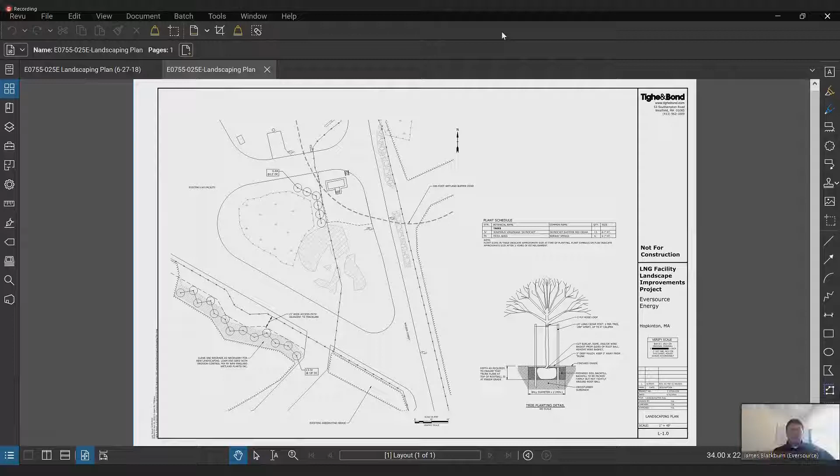Okay, so you're removing some scrub, call it about 20 feet, and are there any other trees or whatnot that you're removing in there? I believe there's one mature tree in that area. If you went back to the street view, Tim, there's kind of one mature tree that is fairly well overgrown, but I would consider it to be a mature tree. It's that one right there. The rest of that in there is primarily brush.

Okay, and then last question for me. You have 15 feet of clearance around the rest of the perimeter fence on the property. I guess that's not a perimeter fence though. No, we have two fences - we actually have a security fence and a perimeter fence. Outside of the security fence, which is just a security fence, we do maintain a cleared buffer. I'll say we strive for 20 feet. I think we often have to thin that down to 10 or 15 feet. In this case, we're probably down to the 10 to 15 feet. But there's a couple areas, I think as part of the new project, there was an area with wetlands, so we limited that so we didn't have to clear into it. So there are a couple areas where it's slightly less, but generally speaking, that's the case.

Okay, Mr. Gelcich, what can you just walk us through - you had a nice note in the memo, but can you quickly describe to us what our options as a planning board are before us? Yep, so many of you are probably familiar with this process. We went through it in November of last year for this project. The planning board can determine whether what's proposed now is a significant change from the intent of the stormwater management permit. And so if those changes are significant, you can require Eversource to come back with a new application and basically amend the permit that was approved through a new application.

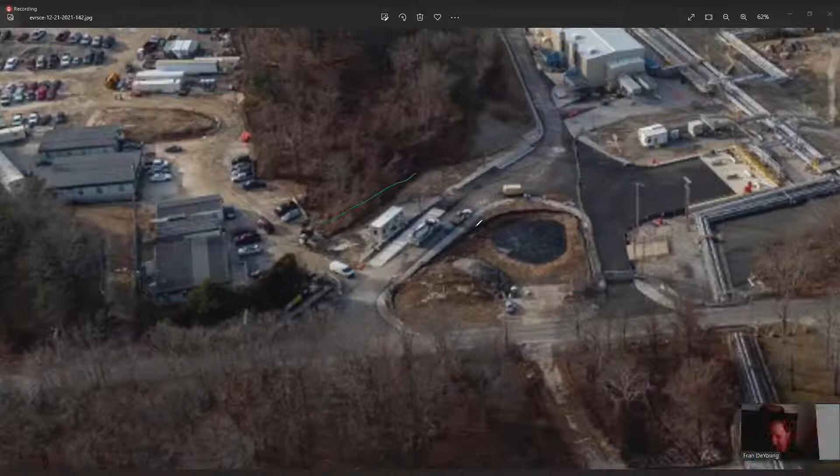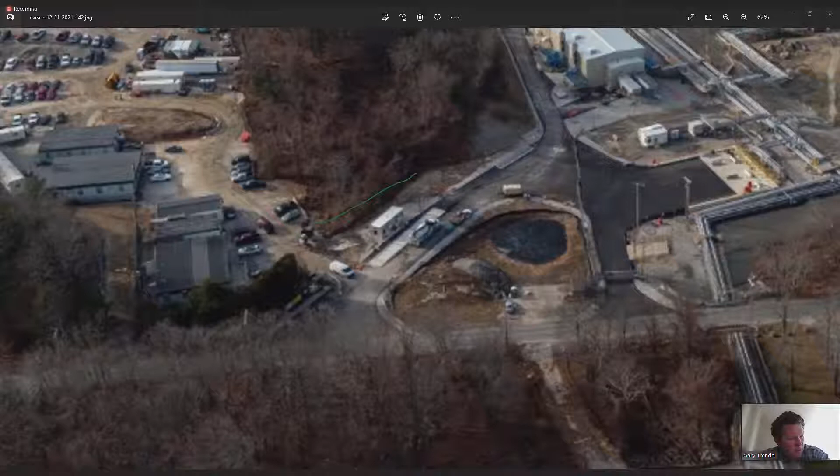Agreed. So on that note, I will entertain a motion to determine that the proposed changes are not significant. John, does the motion need to include anything other than that? You may want to say that the determination for not a significant change includes the work proposed in the application, for clarity as to what you're actually saying has no significance. So I will entertain a motion that the planning board determines the proposed changes are not significant and that the extent of the work is what is referenced in the materials provided to the board. So moved, Mary Larson Marlowe. Rob Benson, second.

Sorry, John, did you have something else? No, you said it fine.

I was just going to say, if you wanted some language in the memo, I have the language from the applicant that they put. The proposed changes to the approved project include approximately 3,100 square feet extension of the current limit of work, consisting of cutting existing trees to provide space for additional screening plantings as required by the Department of Public Utilities in response to a request by the Town of Hopkinton. Perfect, I'll modify that as a friendly amendment.

Accepted. Mary and Rob, does that work? Yes, that's accepted. Mary Larson Marlowe, yes, I agree, Rob. Any further discussion before we take a vote?

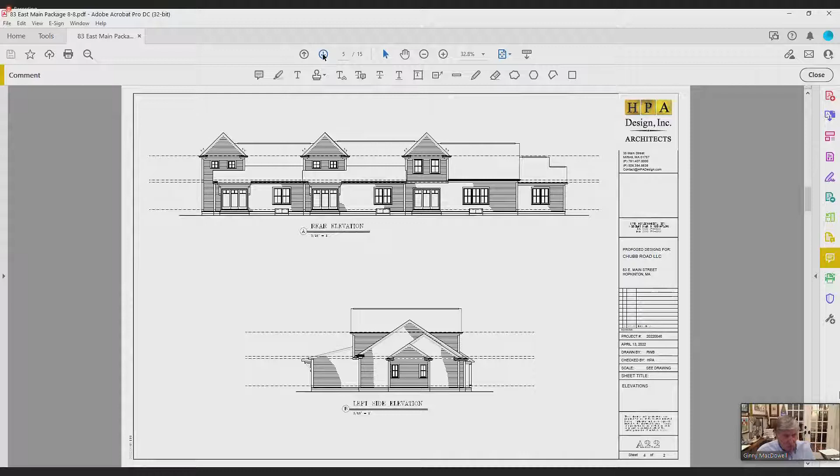This is a frontal view of the 3 units. You can see the 3 garages, the dormers, side view. This is a rear view - you can see the doors going out to some steps, then down to a lower level terrace.

Just to give you some sense, we're talking about some white trim, some very light colored gray tones, something very much in keeping with other things you've seen in the area. Again, a frontal view with some color tone.

This is the antique house that's there currently. We had an architect come out and measure the dimension of all the windows, the cornices, the roof lines, everything, and this is an exact replication of what that would look like. This we submitted to the Historic Commission.

Now we're going to go through these plans. These plans have been reviewed by Phil from Beta, and there was a lengthy list which I have at the end of this. Once we get through these plans, you'll see the updated plans as of today and answers to the questions on Phil's list. These actually are the updated plans, so we're going to go through the updated plans and then the list.

Oh, okay, so you changed them. Yeah, I took out the old ones, they weren't relevant.

So you'll see we created an easement on the far right side of the site in case, for whatever reason, one needs to get in and do some work on that basin that currently exists. So that'll remain an open zone with an easement. You'll notice the three driveway entrances, one driveway entrance coming into three garage entrances. There's quite a bit of detailing with drainage, grading, sewer lines, water lines. When we built Legacy North, we purposely tapped sewer, water, and gas lines into the site from the street, so they're actually already tapped on the Legacy North side of the site.

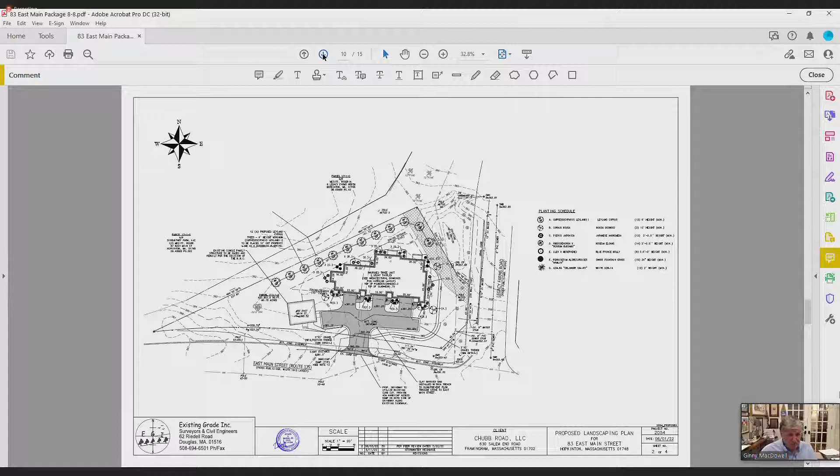Just some details of what's required for the various components of the project. Again, spec details.

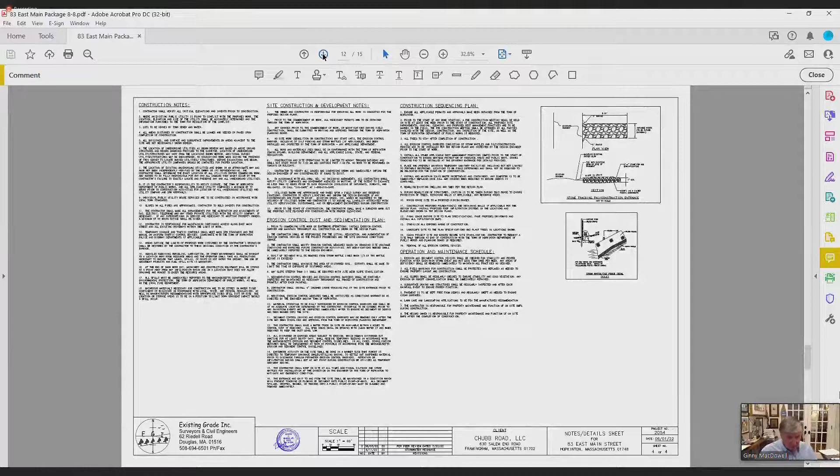Okay, now this is Beta's letter, and these are the answers. I believe our engineer has spoken to Phil earlier today, and I think we've covered all the points. The one point that's not covered here - I sent John an email earlier today from Tom Poirier from the fire department saying that he does have sufficient and adequate fire emergency access to the site. We can go through these or you can just look at them, but basically all the details that Phil wanted, whether it be the handicapped, drainage, lighting, perimeter, siltation during construction.

Again, spot grades, the post-development, the easement that we talked about. I believe we've covered all the points. Anything else, Eric? That was the last page. That's it. Okay, so that's everything.

We're more than happy, whether it be Phil or myself, to answer any questions or comments. Okay, thank you, Roy. We do have a public hearing outline that we'll use here. So I'm going to hold off on questions or comments until we get into a little bit more detail. But our next item on the outline is staff report. So John, do you want to walk through the staff report?

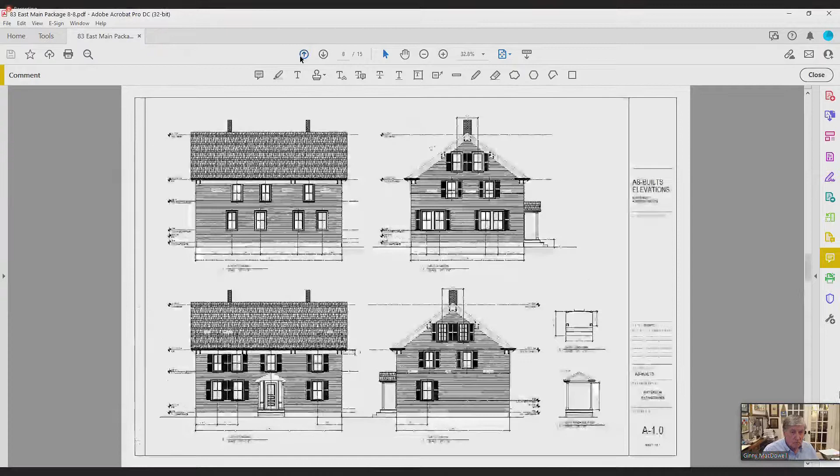Okay, so am I understanding this correctly or not? That there are 4 car garages per single unit, so 12 cars for 3 units. No, those are 2 cars each. Okay, so it's 2 cars per unit, so 6 car garages total. Correct. Thank you, because I'm looking at it like there's no way mathematically I'm seeing this right. No, you're right. Okay, so that was my first question.

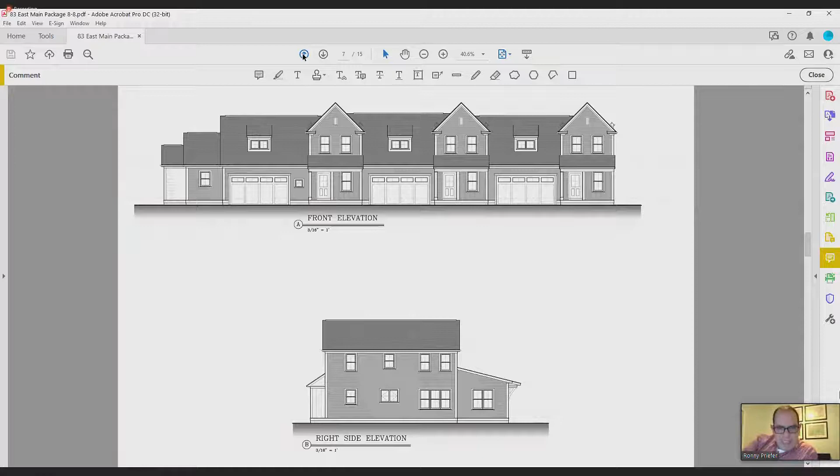And secondly, could you show the rendering of how much driveway would lead up to that? It's like the aerial shot. Okay, and is there enough room for turnaround on the far right? Because I'm looking at the right versus the left. Yes, that's what the little dog leg is for.

Okay, now is it allowable in your opinion for, in the future, someone to have a third car, whether it's a resident or parked there because someone's staying over or something like that? Is there room as opposed to parking on the street? No, well first off, if you have 3 cars you would put 2 in the garage and 1 or 2 in the driveway. So each unit has enough parking for 4 cars. Okay.

Okay, so that was my first question. And my last question I have before, I'm going to save some for others later: what is the square footage per unit?

I don't have that in front of me. Phil, do you remember what that is? Yeah, I think it's approximately 2,200 a unit, very similar to the trails. 2,200 a unit, yeah, and they're all the same size, just different layouts. Correct, absolutely. And then I think Roy spoke earlier, but they are all 2-bedroom units. These 3 are - there's a bedroom and a loft on the second floor. There's a master on the first floor, I believe.

And are these designed for a certain age demographic, or is this for all? No, they're actually age restricted, 55 or over. Okay, thank you. All right, who wants to go next?

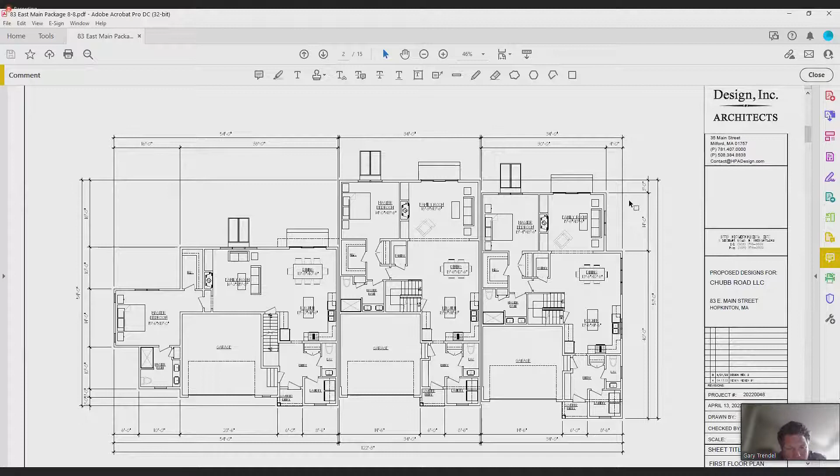I guess it depends on what kind of car. Yeah, no, I agree with that, but on average, my architect will tell me that 22 is the minimum and 24 is desired. I guess where I'm going with this - I realize it's very common for developers to put smaller garages in, but if the expectation is to fit 2 cars and 2 trash cans for recycling and waste into a garage that's reasonably small, and they look closer to 16 by 16-ish. I mean, they look pretty small.

We'll get that information for you. Okay. Actually, I can't tell from here. We'll find that out. All right, it looks to be 19 feet 6 inches. 19.6, okay - it's 19.6 wide by 20 plus deep.

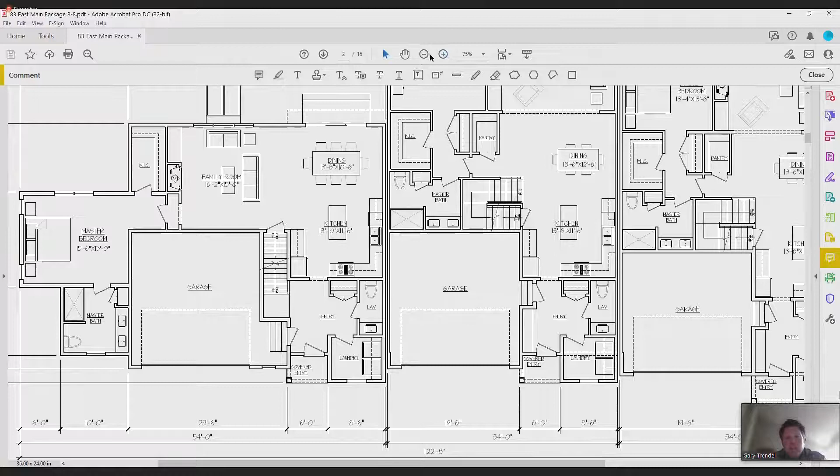Okay, all right. And again, I'm just cautious of the fact that aside from the driveway spots in front, there is no other visitor parking. People have a family gathering - I'm not really even sure where in the vicinity they could park if they wanted to, because this neighborhood is a little bit street locked in a sense.

And then my last question, just on that note - while this doesn't apply to the single family house, that house doesn't have a garage, so it only has 2 spots in front of it. I'm just thinking of a family who are likely going to have 2 cars, and they have a visitor - where does that visitor park? So I'm just a little nervous, because it's not like there's a street they can park on. There's not a lot of options elsewhere. For 4 houses here to not have really any visitor spots of any kind is concerning for me.

Just to note, I believe the historical house has 3 spots. Three. Okay, all right.

Through the chair, one last comment. Yeah, go ahead Rob, and then Ron, we'll go to you after Rob's comment.

So all the way from kind of Clinton Street or Weston Nurseries, this house and this property will basically be the only homes on that section of East Main Street until you get down the hill, and basically at the bottom of the hill, after the area where the Eversource line passes under the road, there's going to be no houses besides this house and this proposed structure for about a mile. So it definitely - and it's at the top of the hill, so people are going to notice it. It's not going to go unnoticed, that's my larger point.

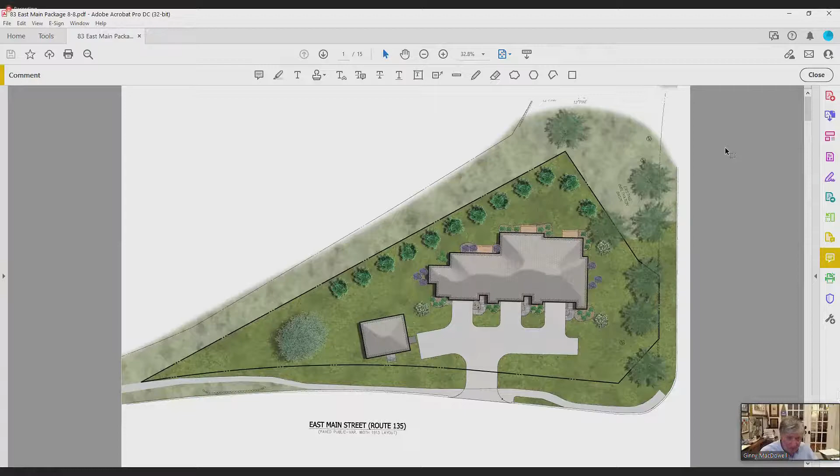To turn right, but I'm asking about turning left. Would that cause any issues? Because if you want to turn left and there's a light there, the cars start backing up because of the light. That's my concern. Yeah, I've been out there many times and I've never seen an issue where it's queuing up beyond that driveway. That's one of the only lights in Hopkinton that doesn't have that issue.

Ron, for what it's worth, I know they've used that lot in the past for parking for events at Weston Nurseries, and at least I've parked there a few times, and I don't recall any big issues there. That's just anecdotal, one person's perspective.

Just one perspective. And so my last comment is somewhat echoing Rob's. If it's not landscaped well and doesn't blend in, I understand you're in a predicament. You have a home there. What else can you put there besides other homes, without making it look odd? Like, oh, we have a home and now we have an office building. It doesn't seem right. That's all I could see. It's the fact it's a single home with a condo complex beside it. That is the part that seems almost disconnected.

But again, if it blends, maybe it's better. Well, I think the landscaping will help in that regard. The other thing is both structures are going to have white trim and clapboard siding, so there's a lot of harmony going on architecturally speaking.